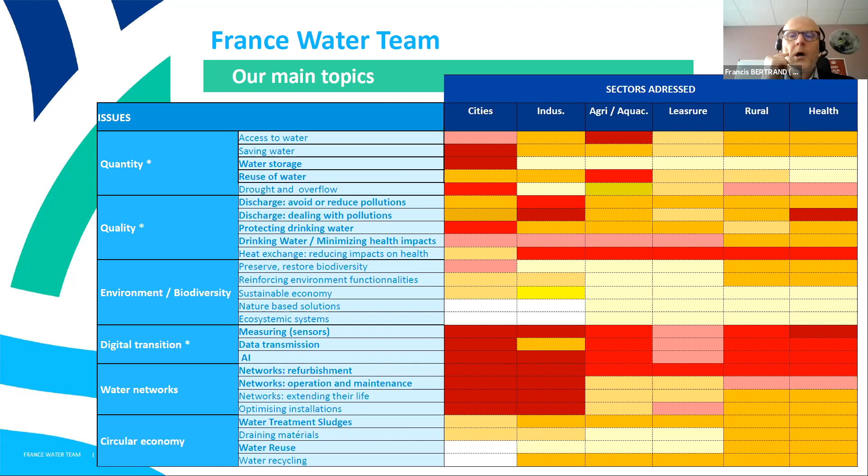The more red, the darker red the cell, the more activities we have and the more important we consider this market for our members and for us. This is the picture of the reality, the picture we refer to, or the analysis we refer to, when we choose to go into one domain or another.

A few words about the challenges in France, but I think more or less you will find the same in global terms in the Netherlands. But anyway, from the French way of looking at that, what we see is something to deal with the quality of drinking water and natural water as well.

Specifically, we look at how to restore both environment and biodiversity. What we look after is considering sludge management in additional or alternative ways.

What else? For sure, the impact of the digital transition is described here, namely at the beginning of the chain, at the moment we have to produce data. In addition to that, because this is usual, new pollutants appear every day, meaning we have to detect and treat them in the best way.

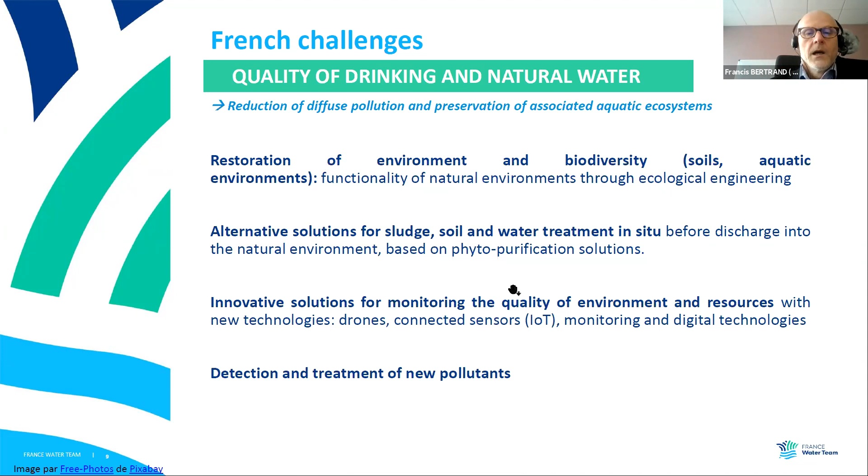Next, about quantity, because I think you're all aware of the last 3 or 4 summers we've been living through. The question of quantity, I should say the question of conflict over access to water, is taking a huge position in our mind. It means that we have to save the water.

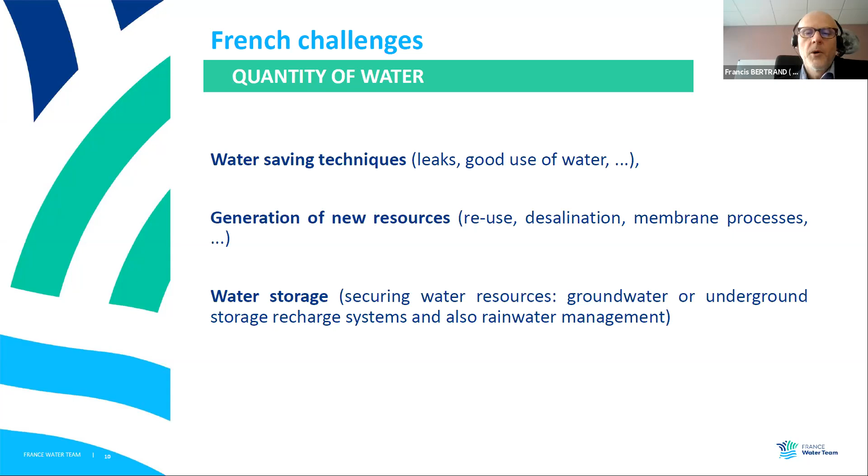We have to generate new resources, and I'm speaking about reuse, for example. And we have to store the water. One of the key questions, the key field not yet in engineering but in research for the moment, is groundwater storage. Last of our challenges are the ones which are more transverse.

When you look at the two previous key challenges, quantity and quality, logically you are driven to think about how to manage that in a smarter way, and manage the infrastructure. So there is a bunch of work to be undertaken on that. In addition, in the pipes you will find cold or hot water, so there is some kind of energy to take and to manage. This is an additional transverse topic for us.

And more globally, as I've been speaking about for a while now, the digitalization question is in our mind in a technical way. As you can see, new connectors, new sensors, and all the group of keywords about big data, artificial intelligence, and so on.

But I should say that prior to developing a big data system, you have to collect a bunch of data to manage them. And lastly, the blockchain as well.

But on top of that, in parallel, speaking about digitalization, we have to train and help our SMEs to jump into this transition, because our ecosystem is populated by small and very small companies, meaning that the IT competencies and IT skills are probably not at the best level everywhere. So we have to help them and help the people to learn and to be more fluent with this impact.

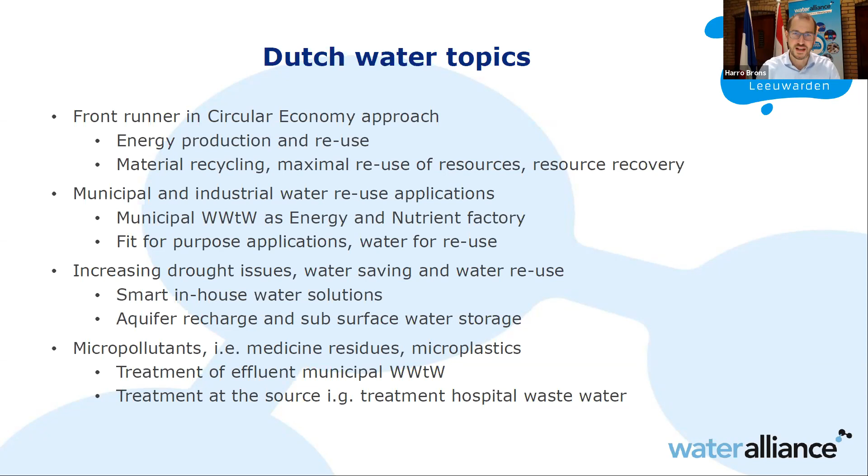So these are the topics I will slowly go through. Wastewater treatment works are looking a lot at energy optimization, for example by a company called Paques with Anammox side stream treatment, so the direct way from ammonium to nitrogen gas without the whole nitrification-denitrification process, which costs a lot of energy. A hot topic is the thermal hydrolysis of sludge.

I guess here also we see the need for economy of scale, but more biogas and less quantity. And maybe more relevant for the Netherlands than France, but I can't really judge the French situation, is this aquathermal solution - heat recovery from wastewater. We now see first concrete projects in the Netherlands where city blocks are being heated by a central heating system, where the lower, or the smaller delta T, of wastewater is used to do that city heating.

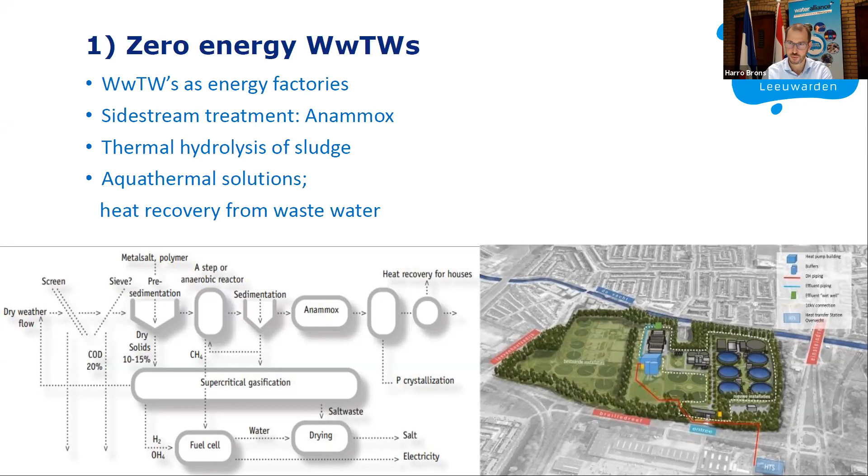Another topic is cellulose recovery from municipal wastewater, also to reduce the sludge amount. We have one speaker today who will talk about that in more detail. And if you talk about nutrients, you talk about struvite harvesting - magnesium ammonium phosphate - phosphate being a non-endless resource. So if we can get that out of the wastewater, we can of course close a cycle, and we also have a value chain.

With regard to production of bioplastics, we recently got the news that there's a full-scale project now being planned in the Netherlands at a municipal wastewater treatment site to produce biopolymers from sewage sludge.

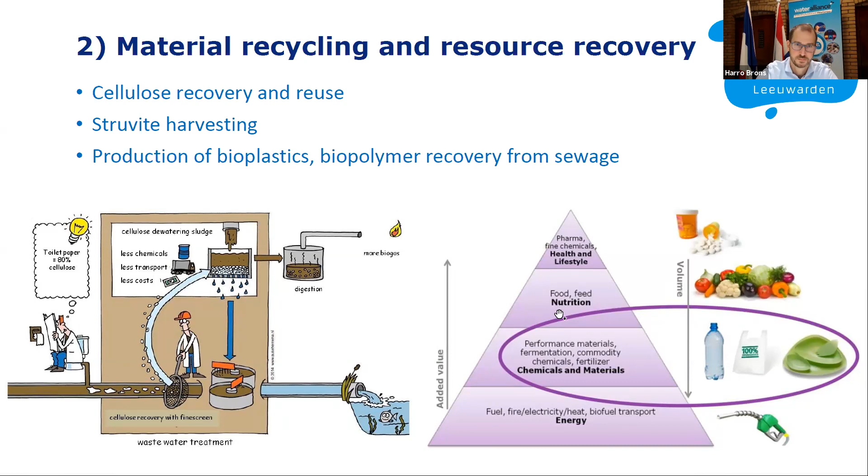Well, this point was also briefly mentioned - I think it's also been a topic for quite some time in France. If we want to remove micropollutants, for example with a quaternary treatment step, membranes, AOP, or adsorption also an option, we create such a good quality of water that this can be a fit-for-purpose water for industry.

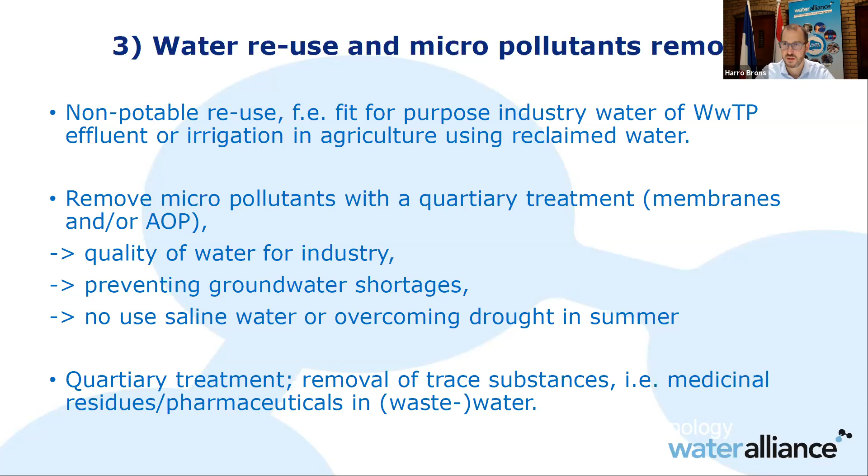And if that, for example, means - like a project I'm thinking of - that industry doesn't need to pump up saline groundwater, for which you would need a reverse osmosis installation, then you have additional added value. You remove those trace substances and create value also for industry, and for example less saline groundwater if you're close to the sea. It's of course all non-potable, so we do really talk about fit-for-purpose industry water or irrigation in agriculture.

We do also see more and more water technologies in the built environment in our cluster. Two examples: decentralized treatment with source separated sanitation by DeSaH, using vacuum toilets but treating differently the black, gray, and rainwater to get nutrients out, energy out, or reuse the water. It's a very interesting solution, for example when it prevents you from having to invest in a very large sewage treatment network. There is really a business case for such solutions.

The other one, from Colubris, is a metabolic network reactor. These are smaller footprint municipal wastewater treatment plants, but almost with a recreational character, combining the treatment with integration in a building as a green place to spend time.

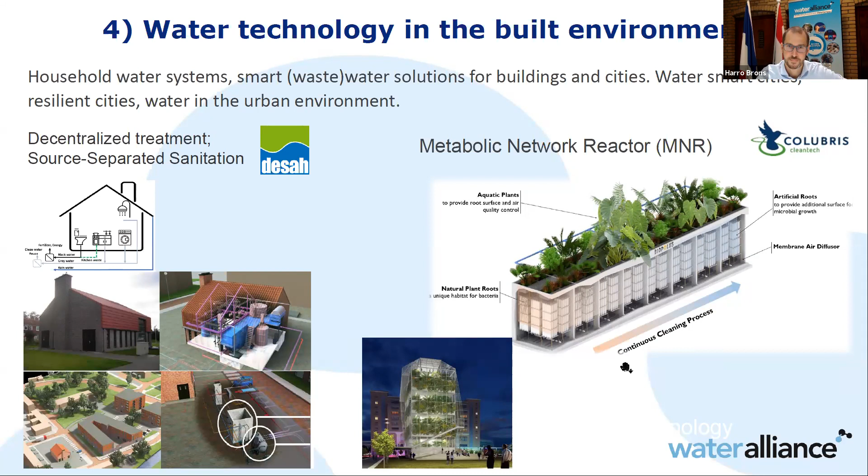Another one is Hydraloop, in-house gray water recycling. To put it briefly, you use your shower water, treat it in a Hydraloop unit the size of a refrigerator, and use that treated water to flush your toilet instead of high-value drinking water, or to top up the pool. Hydraloop is expanding at this moment worldwide to solve that kind of in-built household solution.

This is a topic I did not really put a lot of effort into, but it is a large market, as also Mr. Bertrand touched upon: the digital transformation, Industry 4.0, the Internet of Things, artificial intelligence, big data. And rightfully said also by the France Water team, I think also very important in that talk is the sensing, so the production of data, let me put it like that.

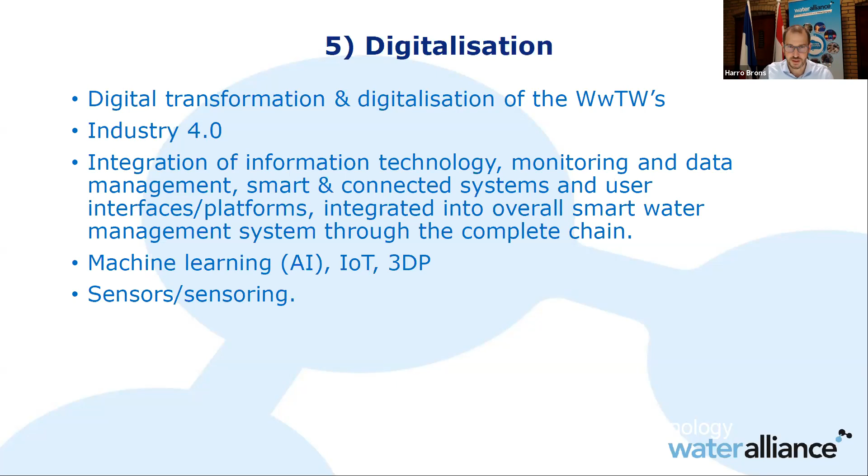I think I also see at Wetsus a large effort in developing lower cost, effective, generic type of sensors - it's a hot topic. AquaSuite is one of our members, quite active in this field, with an analyst and autopilot for utilities.

One interesting point I wanted to mention today is the target that the horticulture sector and the government have issued to become emission-free by 2027. This means a far-reaching removal of crop protection products from water that you discharge, although you try to limit discharge as much as possible, so reuse almost all the water through growth optimization and zero-emission growing.

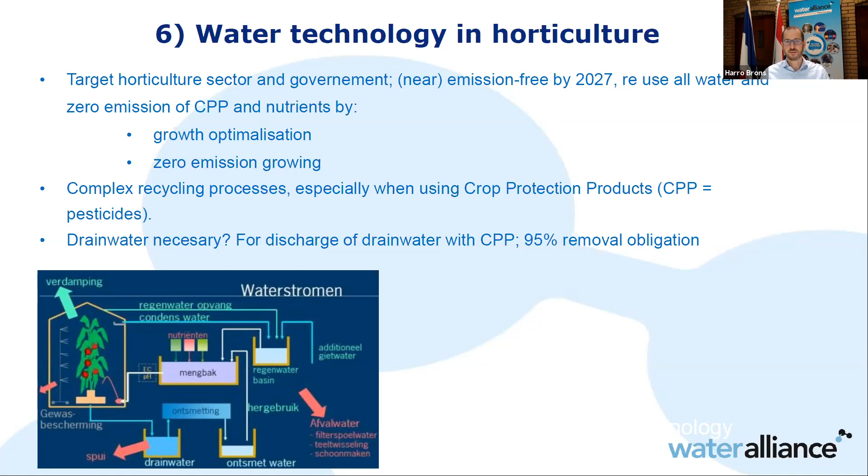These are typical AOP type of solutions. Here from Van Remmen, an example with UV for disinfection and hydrogen peroxide for the oxidation step, removing crop protection products, pathogens, and microorganisms to a high degree to protect, in the end, the ecology and the environment.

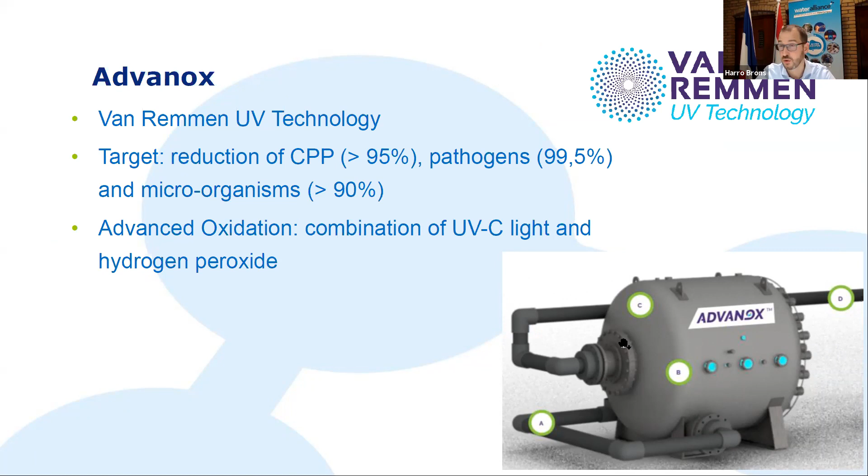Another aspect I briefly wanted to touch on, where we see initiatives in municipal wastewater treatment as well: in general biological processes are interesting, however they cost generally quite a lot of energy for aeration, for the mineralization process. So the idea has been developed to do a complete 100% physical-chemical treatment line, in this case with electrocoagulation, dissolved air flotation, and nanofiltration.

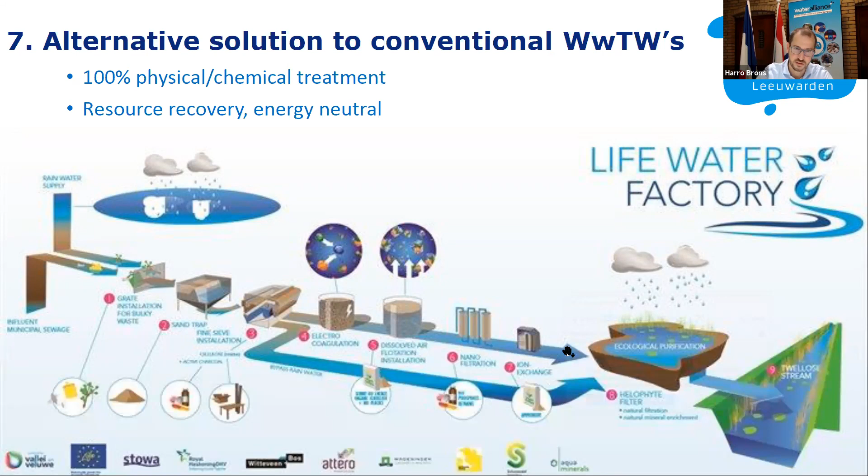Some of these physical-chemical treatment technologies are also used by Bluecon - very interesting decentralized municipal wastewater treatment plants, up to 20,000 people equivalents, but also smaller ones. I think it's also a charming solution for coastal regions with a lot of tourists in summer: these kinds of systems you can easily switch off in winter or put an extra line in operation when you have more or stronger population because of tourists, for example.

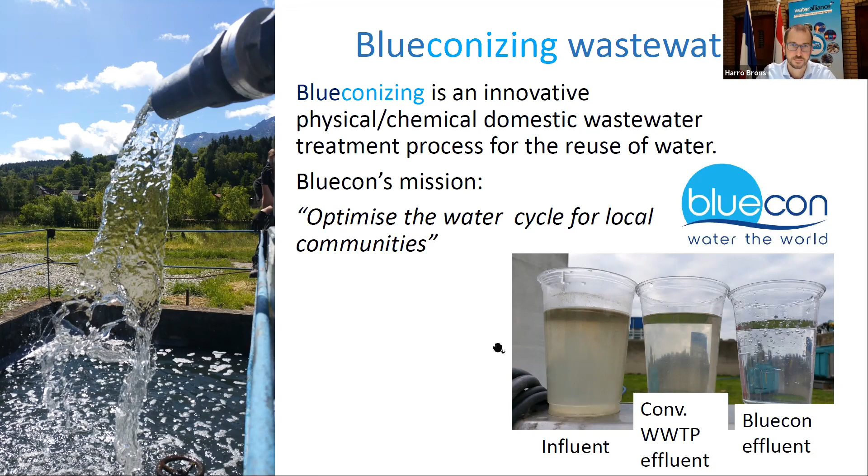Well, this was in brief my presentation.

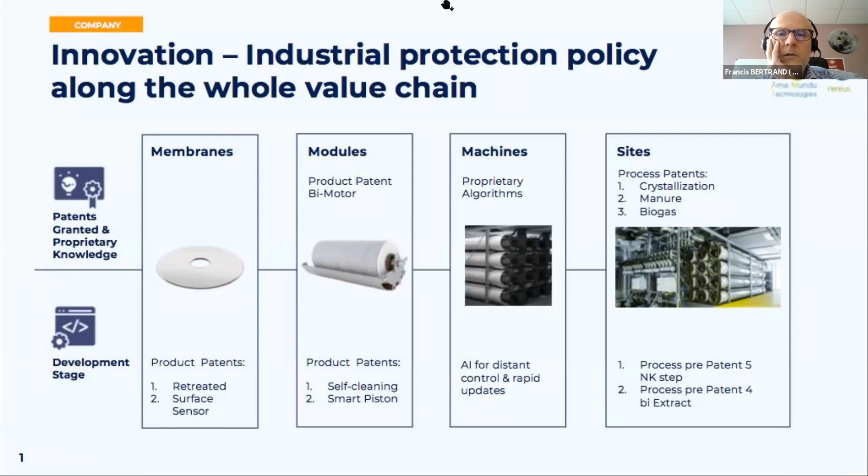Francis Bertrand, may I give you briefly the floor to introduce the French companies that will be presented? I'd like to, but to be honest, I'm jumping into the next meeting right now, a bit of an incident. But if you can give me the list, I will refresh my mind to have the specific and best words - well, they will of course pitch themselves. It's Nereus, Altereo, and Watchfrog that will be presenting today. I didn't get you - I see the first slide of Nereus. Emmanuel Trouvé, good morning. Shall we just start, Francis? Is that okay? Yes, it would be better.

Okay, yeah, there you are. You should be able to go through your presentation now. Hope so. So in this first slide, I will present the heart of Nereus technology - Nereus, sorry.

Nereus is now a 7-year company founded in 2013, and we are producing systems using a disc-shaped ceramic membrane.

The main breakthrough with this geometry of membrane is the drastic decrease in energy consumption for the same result. This is due to the fact that we abandon cross-flow filtration. We just move the membrane instead of moving a lot of liquids tangentially in front of the membrane to clean them continuously.

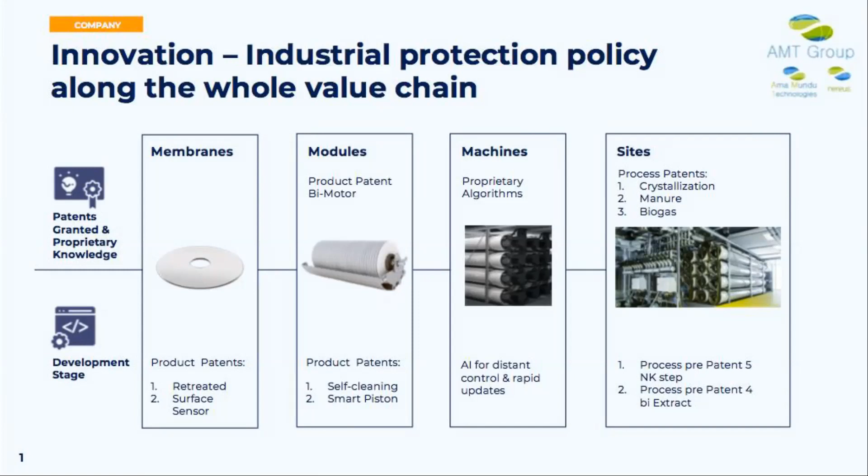So what we do is designing process, manufacturing the machines in the area of Montpellier, south of France, and incorporating modules and membranes. And so I will just now present 2-3 types of clients we can address with this type of technology.

This is an example of the client we have in the biogas production sector. In this example, the biogas producer is generating 62,000 tons per year of raw digestate. Our process is designed to crack this digestate into water and solid and liquid fertilizers. It's a huge challenge because the increasing production of biogas is generating enormous amounts of digestate, and just land disposal of this digestate is becoming almost impossible.

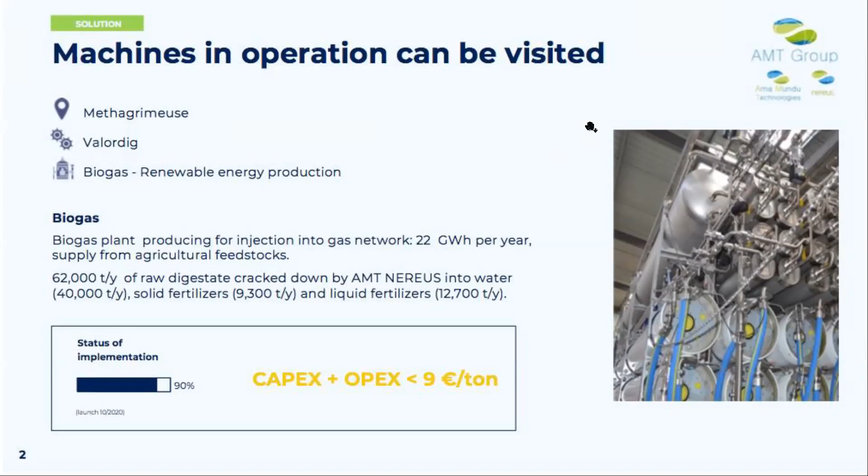So now we have 7 plants of that sort in France, and of course we are interested in challenging digestate solutions that are implemented in the Netherlands, where, as far as I understand, you need land for either sludge or digestate disposal. The second type of implementation we do is dedicated again to cracking industrial wastewater.

Here it's about a food waste collection and transformation industry, and we concentrate all the wastewater of the site in order to recover the valuable material and send them to biogas production. And we match the water quality requested for both recycling on site for the cleaning needs and disposal, matching the disposal limits.

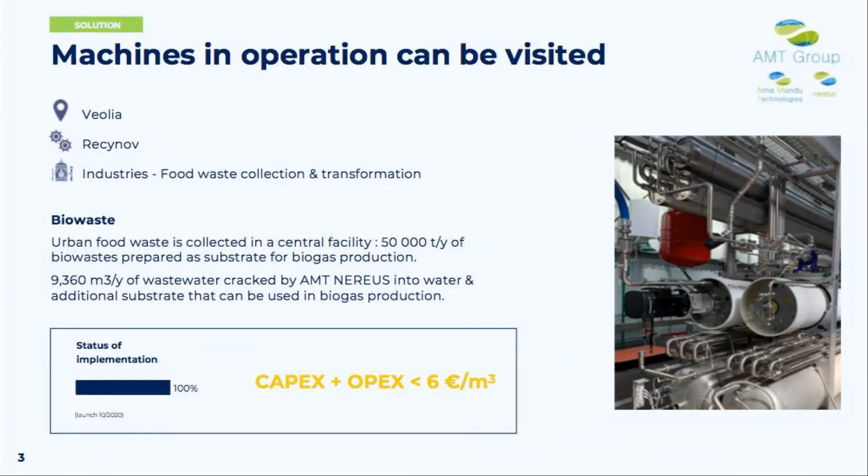Finally, we also work on grey water, and for 3 years now we operate systems in big campings in the Mediterranean coastal area, and this is key to face drought by recycling as much as possible of the water. At the moment, not all usages are allowed for recycled water, but the list of authorized usages is increasing.

During this presentation, I mentioned the CapEx plus OpEx cost, and what you can see is that we are able to produce or extract water at very low cost. For this example, the recycled water is produced at a lower cost than the network drinking water cost, and it's key to produce this water in an efficient way without subsidies.

These kinds of systems are able to be implemented in sustainable blocks, sustainable buildings, either for potabilization of drinking water, of rainwater into drinking water, or of course production of clean water from grey water.

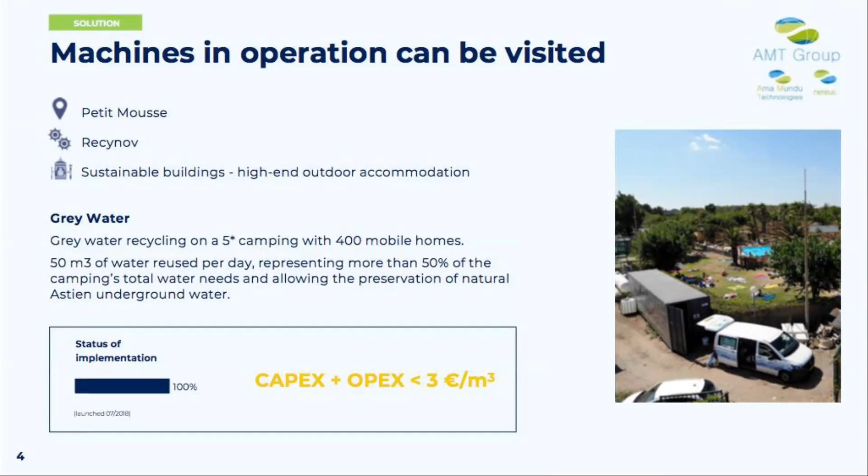I mentioned that there is a European standard which will help a lot with implementation in all European countries. I give you the number, it's the 16941 standard. This new standard describes how to implement water recycling systems in buildings or sustainable or eco quarters.

We have been successful in many awards, and it's good for us to see that, especially during the Pollutec fair, we succeeded in being recognized as a water extractor instead of a water treatment system. Thank you.

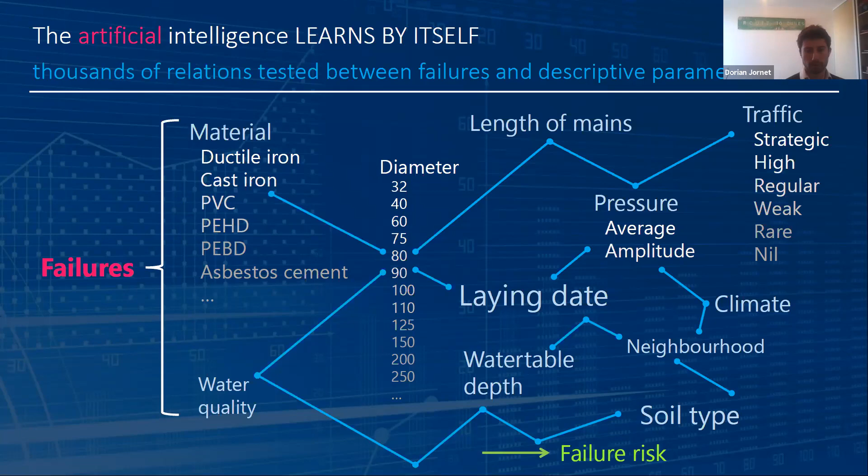And then we can also add some more data into the AI to get renewal programs that I will talk about later. So basically, we take all that information together, we put it in the system, in the AI that we developed, and then with all that information, we come up with a failure risk. With that failure risk, we do some renewal programs for municipalities.

So just to give an example of how it works and what we can do, we worked 2 years ago in Nouméa, in the capital of New Caledonia, with the municipality. They had about 20 years of data on the failures that they had on the system, on the water network. And we took 10 years of this data to calibrate the model, and then we used the last 10 years of the data to validate the model.

So basically, we understood that by taking all the information that they had of the system, putting it in the AI, we checked that if after 10 years of the first data we had used HPO, we could have saved 50% of the leaks by changing only 5% of the network. So it was really an interesting result that we got with the municipalities. And that was the first one.

So we tried the technology on Nouméa, and then many other cities. We've got 4 or 5 examples in France. We also worked in Namibia. I was based there for 2 years for the company. So we worked in different cities, and we're also working today with the research and development study with HPO with the Greater Paris.

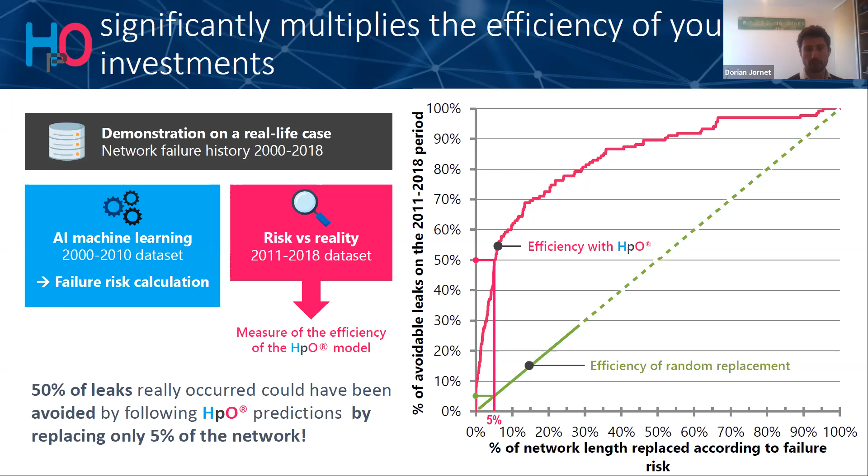So basically what we do with all that information is for the municipality, the clients, to get two things. The first one is a leak detection strategy. So we can say, according to the last years of data that you have from your system, you should focus your leak detection strategies in these areas. So we don't look at, I would say, the DMAs, district metering areas, sectors, and all the usual leak detection strategy. It's more of a broader vision that you can have.

And then obviously you need to do all the leak detection with the tools that you have. We don't do that part, but we can do it with other partners. And then, which is the most important for us, is to do a replacement program.

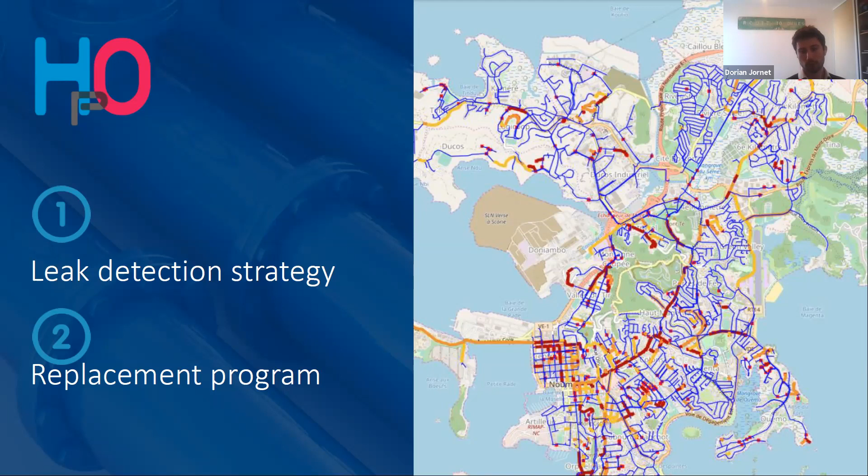So today the municipality has to renew, let's say hopefully 2-3% of the network each year. But most of the time you don't really know how to do it, where to do it, what you need to change first, how you can change it. So HPO is doing it for you. So we say you've got a budget, and then year by year we can focus the replacement program of your network to help you with the renewal.

So we have a quite amazing return on investment, because if you save, for example, the example that we had in Nouméa, with 5% of the network change, we would have avoided 50% of the failures. So the return on investment is quite impressive.

But what is also really interesting is that we focus on your data. We don't have one model that we use for all the clients, for all the municipalities and all the networks. Every time we learn from your data to get a program with it. We have to adapt it every time. So the most data you have, obviously, the better, because we can calibrate and validate the model much more. Otherwise, if it's insufficient, I don't think it will be the case in the Netherlands. But otherwise, we can help the system with other examples to get to learn from the network.

And we have a lot of results with it. What we are looking for today is not directly to sell the technology to clients or municipalities, but to get partners in the water sector that are interested in this technology, to expand competitiveness in the market, to get more products, more markets, more offers to win, so we can work together on partnership. We're not just looking to sell the technology once to someone. We're trying to find partners and work with them on the technology with the clients they already have.

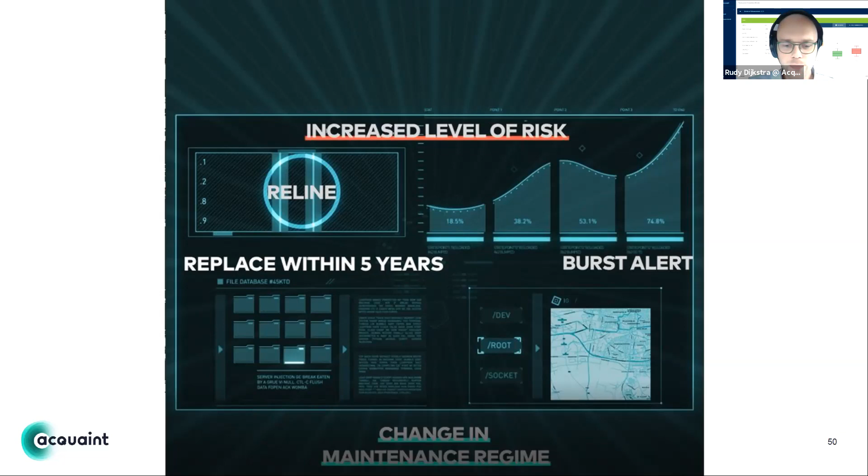I think mainly in the world, the aging assets problem is one of the biggest issues that the water utilities need to work on, although a lot of utilities are struggling with reducing leakages as well. Both are quite related to each other, and I think this picture demonstrates a so-called autopilot for the water industry to be able to perform just-in-time actions and preventive measures. Basically, it tells you what to do, when, and how. I will elaborate on that.

So basically, if we have a look at France or Europe mainly, France has a leakage rate of around 20%. In Europe, on average, it's 23%. So that's quite a lot of leakages that occur in Europe.

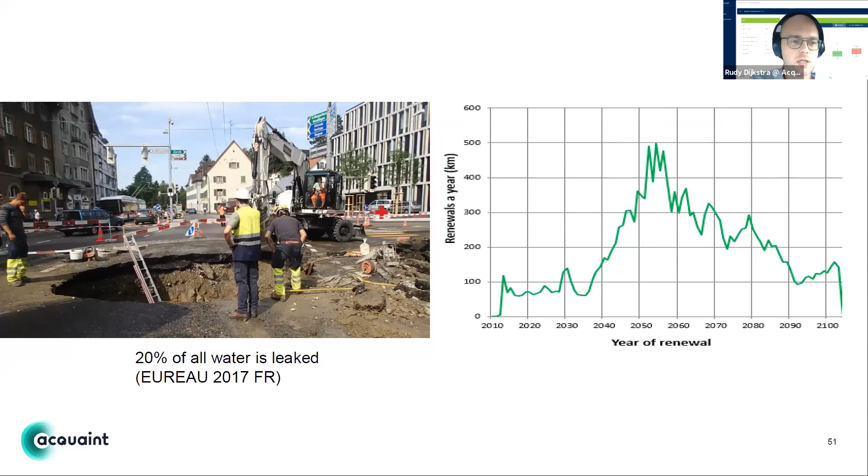On the right side, you can see the renewal program of a Dutch water utility, and one of their issues is that they are facing quite a so-called bulk replacement by 2050. And you have to imagine that nowadays it's still already hard to work on all the replacements that have to be done now. So by 2050, you can imagine that there will be a lack of skilled personnel to work on these replacement issues. And with aging of pipelines, you also will obviously get an increased leakage rate. So both are quite significant.

So the solution that we provide here is that we developed a technology that's able to inspect these water mains, for drinking water and wastewater. And we have three solutions in this case.

One is the Acquarius, a tool that is being propelled through the line with water pressure. It can collect data for many kilometers of pipes, from 6 inches diameter and upwards. So it collects data on almost 98% of all the failure mechanisms that occur in these kinds of water mains. So it's quite a lot.

And the most important thing here is that it is absolute data. I think if you want to be able to make predictions for these kinds of water mains for the future, you need to have highly reliable data, and data being absolute is quite a big advantage here.

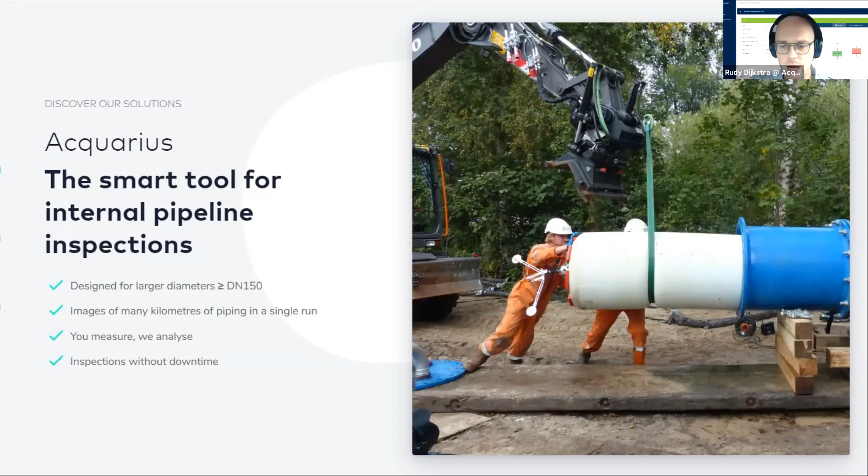One of the things that we developed here as well is that we can do it on a do-it-yourself basis. So in the Netherlands, we already equipped some utilities with these kinds of tools so they can collect data on the go. And I think the next tool also demonstrates the same thing - we equipped Dutch mechanics from the utilities with this kind of tool to collect data on the go. In our opinion, every opportunity that there is to collect data should be used to make these kinds of models for replacement even better.

So the data is being collected in the field and directly uploaded to the cloud and presented to the asset manager. So the asset manager directly knows the remaining life of the specific spot and also the probability of failure in time, so also for future failure rate. And the data is being used for data science purposes as well. This is the third solution that we offer, not included in this presentation, but you can visit our website - it's more demonstrated over there.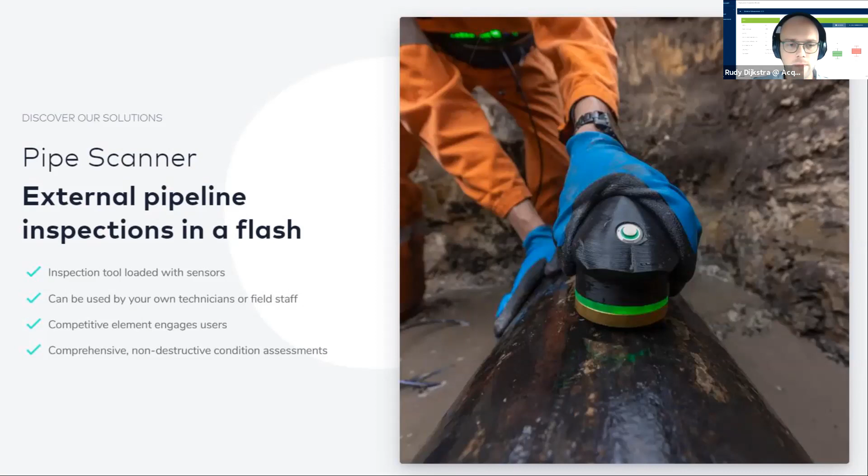So I think we heard a lot this morning already, and I would like to illustrate this so-called bow tie analysis, where we're at. Basically, in these kinds of infrastructures you see two things: one is on the preventive side, the left side of the bow tie, and the other technologies are more or less on the right side, working on leak reduction and the consequence of failure. We aim to focus on the left side.

So, determine the degradation rate for each failure mechanism that occurs, being able to also develop a so-called maintenance regime for these kinds of pipes, so you can treat them well before it fails.

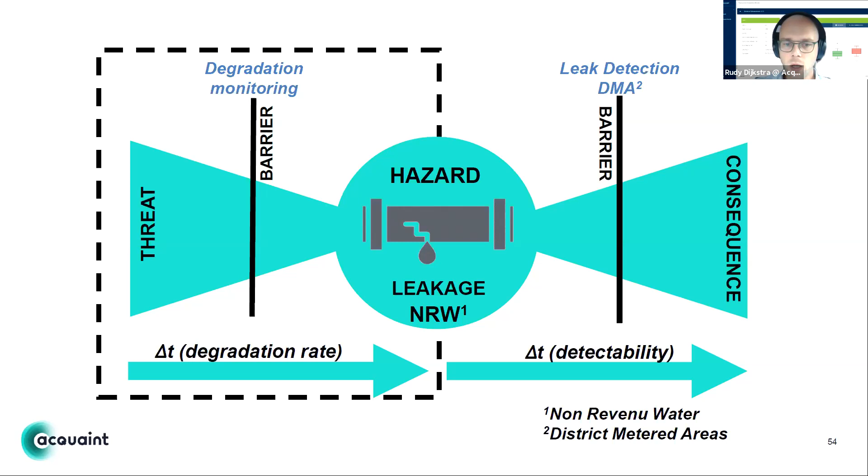If you want more details on how it works, you can obviously contact me. Being a spin-off of WETSUS and being nominated for the Deloitte Fast 50 Awards here in the Netherlands, we are willing to expand our business also to France. France is for us a country that is quite high on the ranking list, so we're looking for strategic partnerships, and maybe today already found one. Dorian, I'll suggest we have a phone call. With that, we will be able to work together on a future-proof water network, providing us with safe and healthy water for time. So thanks a lot. That's my presentation. Thank you very much, Rudy.

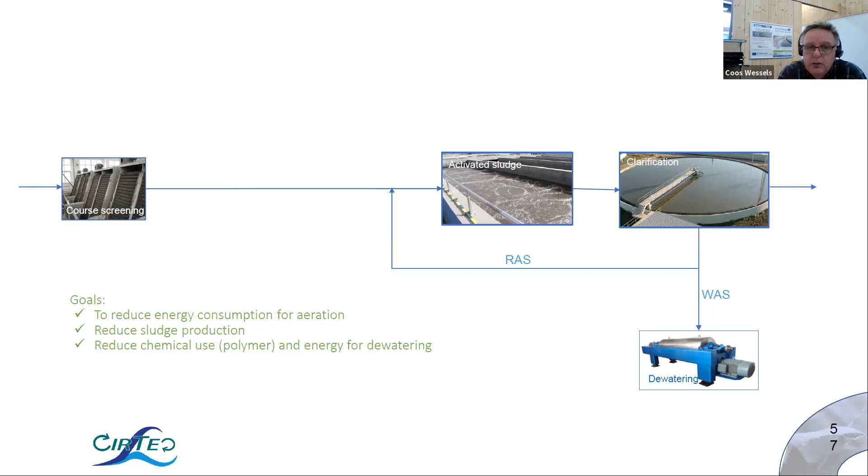It's not something that we thought of one day, okay, we're going to start recovering cellulose from sewage. Basically, the idea comes from a contest that was in the Dutch water authorities, where a statement was made that sewage contains more energy than it costs us to treat it. So theoretically, you can produce energy from sewage. With the goal set to reduce energy, our idea was to filter upfront everything out of sewage to lower the energy consumption for aeration, to reduce the sludge production, and with that the energy that is consumed by sludge dewatering equipment, and to reduce chemicals like polymer for dewatering.

So in the first stage, what we did is we introduced a rotating belt fine screen, doing a test already in 2008, and harvesting a material that we refer to as cellulosic screenings. We did this at a lot of treatment plants, we did long-term tests to see what is the impact on downstream processes, and I'll come to that a little bit later. As you see in the picture, what you harvest from rotating belt fine screens is a material that contains a high quantity of cellulose. Cellulose finds its origin in toilet paper, of course. Knowing that what you screen is a lot of cellulose, it also makes you aware that you have a product that might be sellable for higher applications.

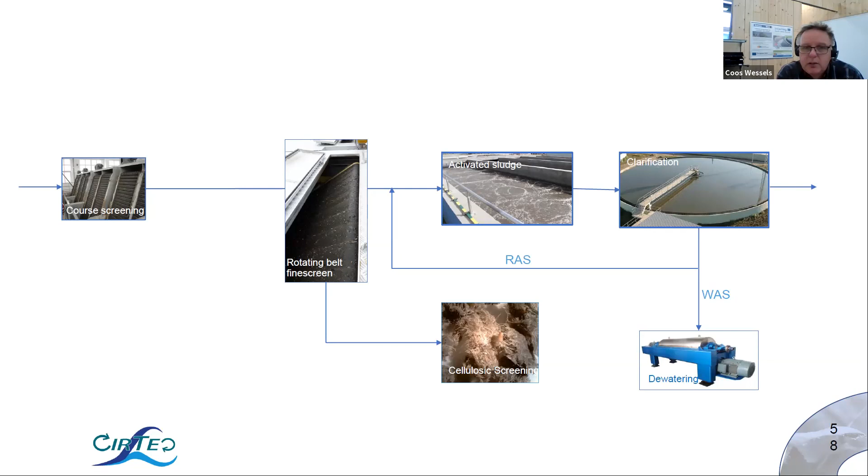Well, the product coming from the rotating belt fine screen still contains approximately 30% contaminants, meaning that this is not a marketable product. So with that, we made an additional step, putting in line what we call a cellulose washer. What we did is put a piece of kit upfront of the rotating belt fine screen to remove hair, seeds, fats, and all kinds of contaminants that you don't want to have in your cellulose as a marketable product. Doing that, we came up with a material that has a purity of between 96 to 98% pure cellulose. And we market that as a product called Recell.

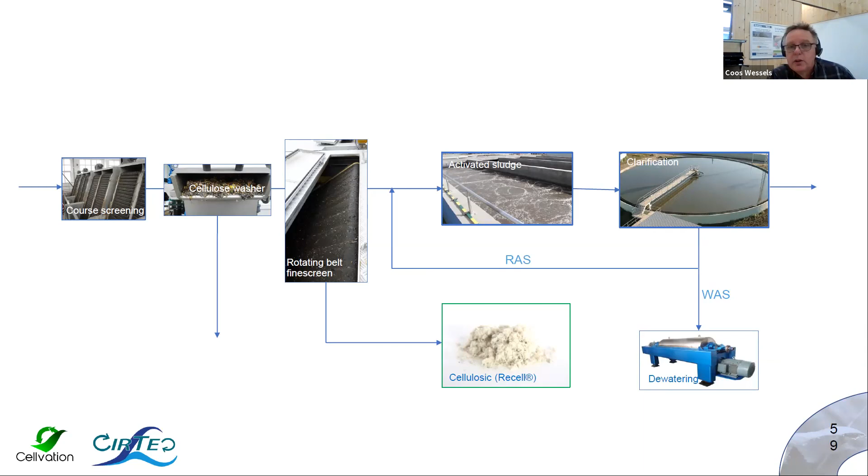Then the wastewater or sewage treatment side of things is done within CIRTEC, and the marketing of the cellulose, the Recell, is something that we do from a company called Cellvation, where we are in touch with the market, developing all kinds of products.

Then what brings this to you?

As I said, we did a lot of long-term research over the last couple of years to see what the downstream impact is of our technology. Implementing this technology reduces the COD load to the treatment plant by 20 to 25%. With that, the activity of your biomass increases, because a lot of the things we remove remain in the aeration tank as inert material. With that, we reduce the energy for aeration by approximately 15%, sludge production by about 20%, and of course the chemicals for dewatering.

But what is maybe more important is that you have a product you can treat as a high-end resource. We sell our material right now to the asphalt industry as an additive, and for production of biocomposites and construction materials. We're also developing other markets like bio-based chemicals.

On the right side of the slide, you see a bit of our process, how it's working. If you look at the impact, an independent company, Kompetenzzentrum Wasser Berlin, looked at the life cycle analysis and the reduction of CO2 footprint. If you apply the ReCell again as a product, you see that per ton of cellulose, we save approximately 2.5 tons of CO2 equivalents at a treatment plant.

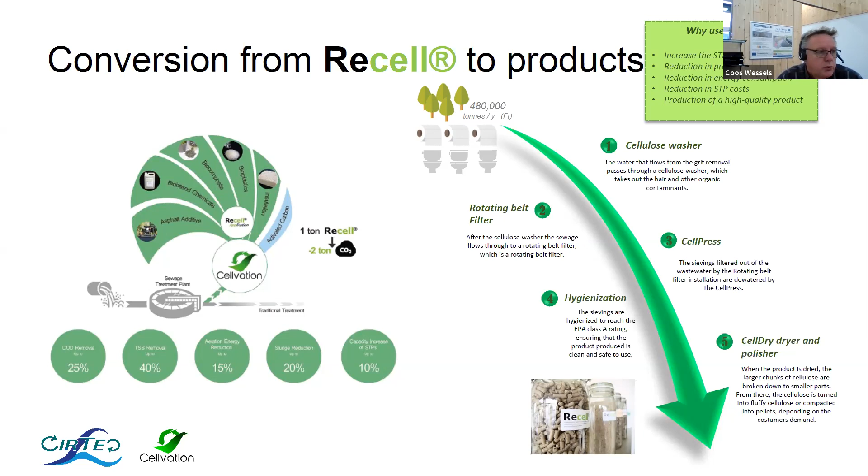Then what could be the impact for France? I looked a little bit into the sales of tissue paper in France, and that is approximately 690,000 tons of cellulose that is sold.

It doesn't all end up at the sewage treatment plant, but based on some analysis of the amount of sewage really treated by sewage treatment plants in France, a calculated value of what should end up in the treatment plant is approximately 480,000 tons of recoverable cellulose a year from all the treatment plants. If you apply the 2.5 tons of CO2 equivalents to that, if we would harvest everything, it would save approximately 1.2 million tons of CO2 equivalent.

We could fly about 150,000 people from Amsterdam to Sydney and back to have about the same pollutant factor.

Why is cellulose so important? Cellulose is also a product that we import. Also in France, there's quite a degree of material that is imported. So there is a market in France as well.

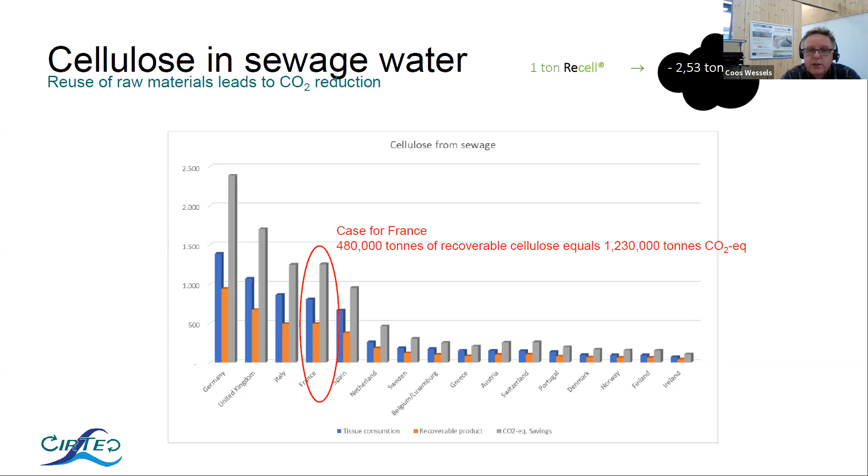And we looked at all kinds of applications of the product. Salvation was a project we did for processing it in asphalt. We looked into making a polymer out of it for the CADOS system, which is cellulose-assisted dewatering of sludge. We made bioplastics out of it in the form of PLA.

Another interesting project might be the WOW project, where we want to do something additional with the residuals we get from cellulose recovery. Through a process of pyrolysis, we want to make biochar that you can activate and use again for the removal of pharmaceuticals and medicine residuals.

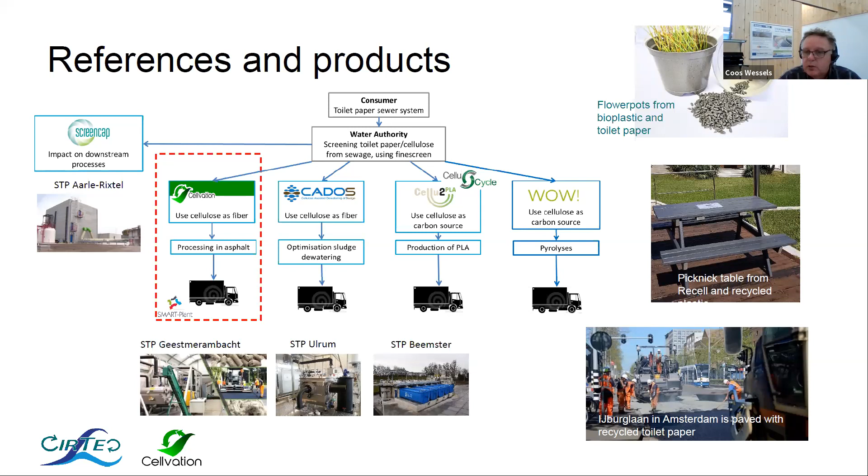On the right side, you see some products like flower pots made with our cellulose and bioplastics from sewage, a picnic table which is a combination of cellulose and recycled plastic, and the asphalt, where our product is now a certified additive used widely in the Netherlands already.

This was briefly what I wanted to tell you. So, feel free to ask.

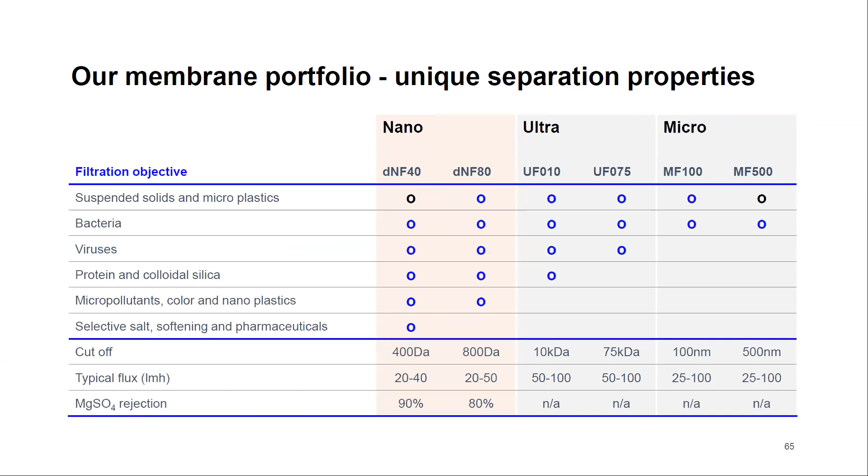Coming back to the previous slide, we are reaching a very high rejection rate, as usual with other membrane technologies, removing bacteria, virus, protein, and micropollutants, which is the key area we focus on with this membrane technology, as well as partial selective salt removal, mainly on bivalent salts.

One key feature of this technology is that we work on a cross-flow pattern in the membrane, keeping it clean. But beyond that, we are also able to control the property of selective separation, because the concept of nanofiltration is very different from what most people are used to, basically spiral wound, either nano or reverse osmosis.

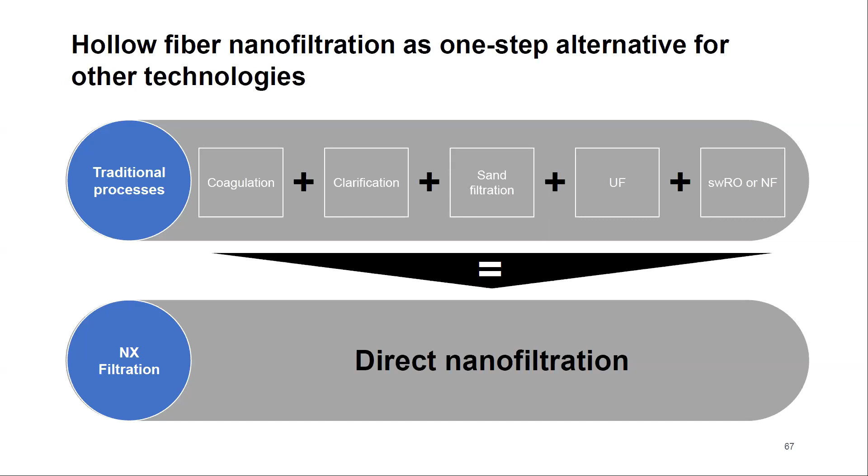We work with three key parameters: cross-flow speed, recovery, and transmembrane pressure. By utilizing these parameters, we are able to adjust the efficiency of our membrane and treat everything in one single step. Most of the time, this technology will also be combined with other technologies depending on the end purpose and the required water quality.

So basically, it's a membrane technology that does not need any pre-treatment other than a fine screen in front of the membrane. The energy consumption is up to a maximum of 0.3 kilowatt hours per cubic meter of water treated. Total cost of ownership is usually in the range of 0.2 to 0.3 euros per cubic meter. One key feature is that we don't use any chemical material to facilitate the filtration process.

This means we only use chemical cleaning agents when we need to clean the membrane for normal fouling, such as biofouling. It's also a very reliable technology because its removal properties can be verified using integrity testing on stream while the plant is operating, which provides quality assurance about removal rates for bacteria, virus, and other micropollutants.

The membrane material is basically polyether sulfone, modified to reach nanofiltration capability, and is easily chemically treated for cleaning purposes across a pH range of 1 to 13, which means this membrane is also simple to clean and simple to operate.

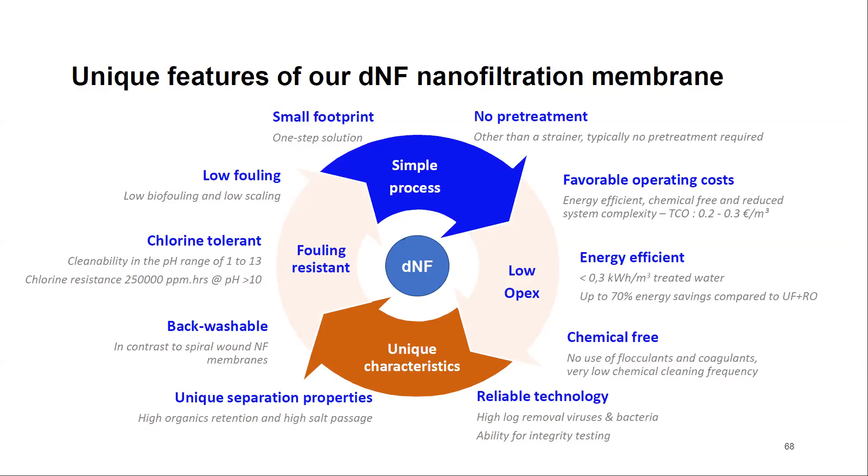I'll come back to one example. This is a potable water production case in the Philippines, where the water resource was polluted with humic acids and suspended solids. We treated the water directly through the membrane, using a molecular weight cutoff of 800 Dalton in this case. It's a one-step solution to provide potable water in a remote area. The color removal rate is above 95%, with a recovery of 80%.

That's just one example, but we concentrate most of our efforts with this membrane technology on wastewater reuse, where we have many examples and long-running demonstration plants, among others in the Netherlands, as well as on high COD load, directly treating very heavy loaded waste streams. One typical example is run by a large, well-known soft drink producer in Canada, where we treat sugary waste with a BOD load of about 10,000 ppm and bring it down to 3,000. The concentrate is then sold as a byproduct to the food industry for cattle feed.

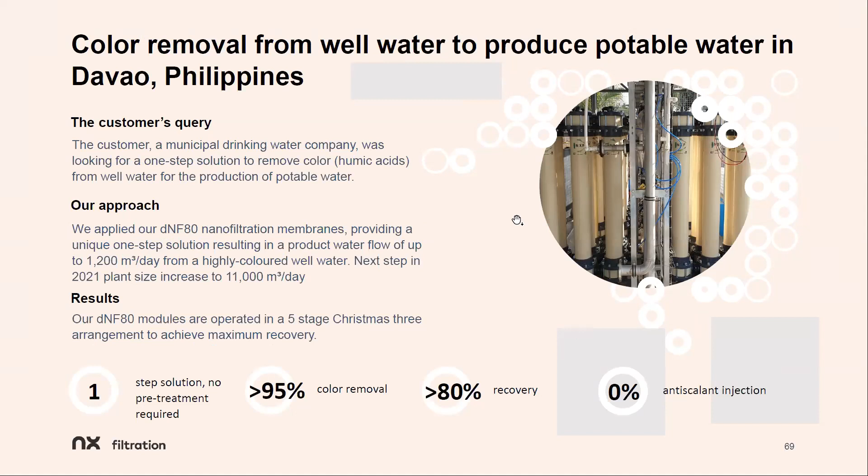So there are plenty of examples, but as the amount of time is limited, we would like to simply say that we are looking for partners in France who could integrate this technology in complete water treatment process. I will be very pleased to answer your questions or to have separate discussions in the future. Thank you very much for your attention.

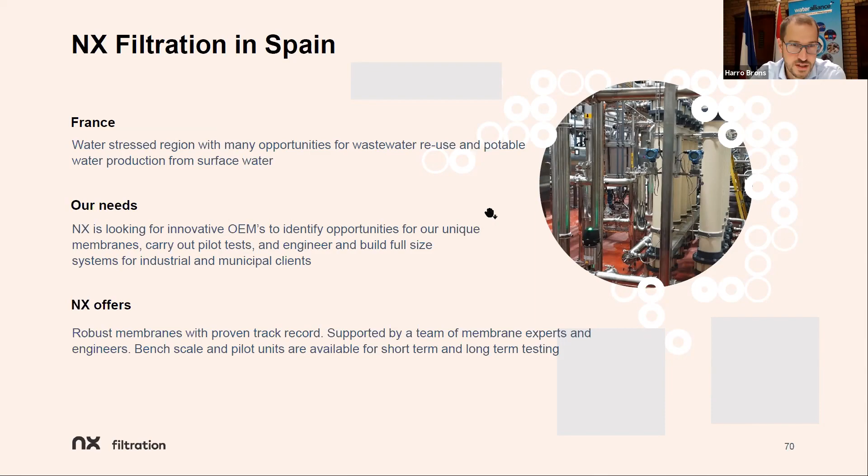Thank you very much, Mr. Dinot, for your presentation. I think, yeah, both from the French side and the Dutch side, we see this focus also on the micropollutants and trace substances. I think you're an interesting example of where you'd be looking for OEMers in France for a typical cooperation. Could very well be possible.